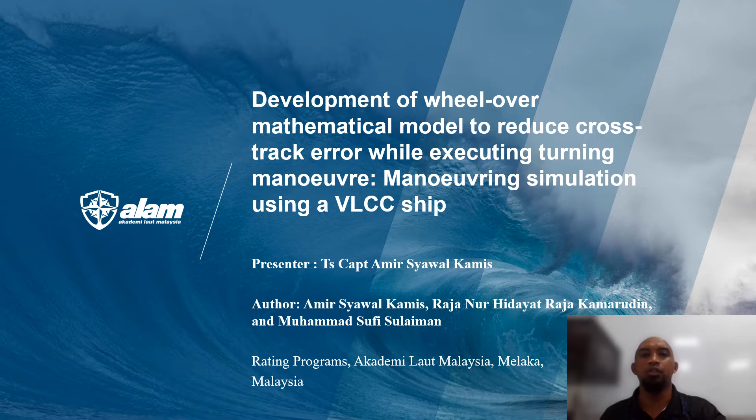My name is Amir Syawal bin Kamis. Today I will be presenting my research entitled The Development of Wheel-Over Mathematical Model to Reduce Cross-Track Error While Executing Turning Manoeuvre, Manoeuvring Simulation Using a VLCC Ship. So a little bit of background of the study.

I think everybody still remembers this incident where the mighty MV Ever Given completely blocked the Suez Canal for 6 days between 23 to 29 March 2021. Following the incident, the Suez Canal Authority demanded 916 million USD compensation due to the blockage of the traffic. Initial investigation suggested that the ship was mismaneuvered due to strong gusts of wind without ruling out the possibility of human error and equipment failure.

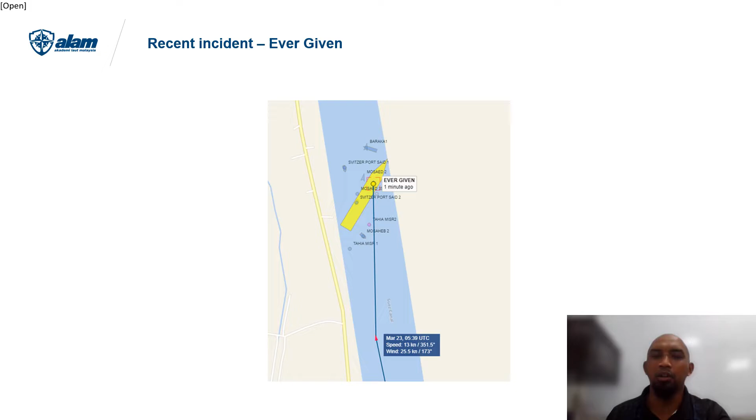And then approximately 3 months later, another mismaneuver incident happened in Kaohsiung, Taiwan. What happened was the OOCL Durban was trying to make a turn. Unfortunately, the vessel overshot and hit YM Constancy, which was safely alongside at the time, and subsequently hit a crane which tumbled onto another crane, which caused a huge catastrophe.

So basically, a ship needs to follow a passage plan or a voyage plan. Prior to a voyage, there will be a plan which will conclude which course to take. There will be a few connected courses that a ship needs to follow. The ship needs to follow this charted course meticulously and avoid going out from the course.

Whenever a ship goes out from the course, this is what we call off-track maneuvering, which can cause cross-track error. There will be a distance between the course intended to be followed and the actual course that the ship is following. The distance between these two is called cross-track error. Staying on course is difficult, particularly while changing the ship's course, where the ship can overshoot from the planned track. Therefore, the wheel-over point needs to be accurately determined.

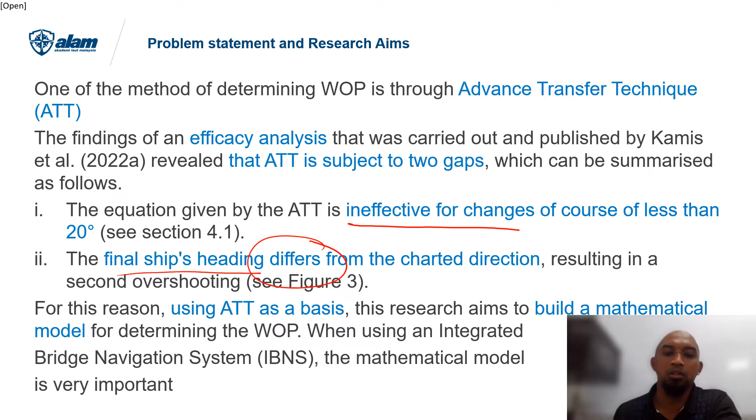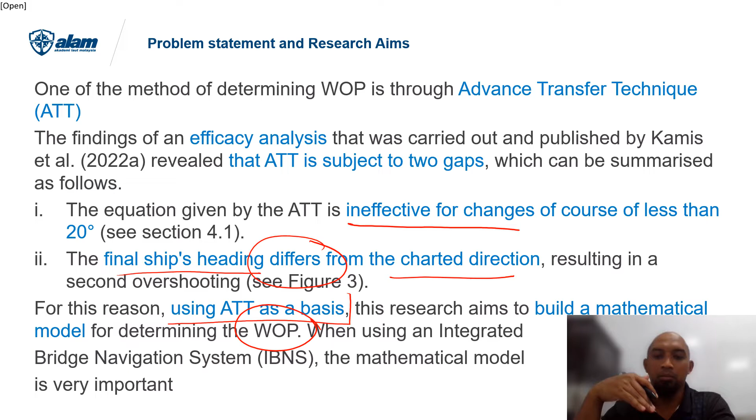The second one is that the final ship's heading differs from the charted direction, resulting in a second overshoot. Later on we'll see visually what it means. So for this reason, using ATT as a basis, this research aims to build an improved mathematical model that can be used to determine an accurate wheel-over point. This is important because the mathematical model can be used as a computer language in the integrated bridge navigation system, because in future everything will be autonomous.

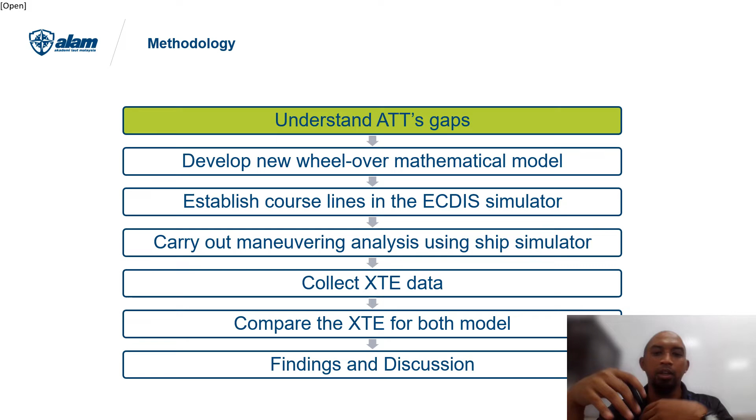Alright, so the methodology. The first step is to review and understand the ATT's gaps. From there, we were able to develop a new mathematical model. After that, we went to the ship simulator to establish the course line and carried out a maneuvering analysis. We simulated what happened when we used the advance transfer technique and when we used the wheel-over mathematical model, and then compared these two data, specifically the cross-track error data, to see whether or not the cross-track error reduced. In the analysis we used percentage change to see the declining trend of the error.

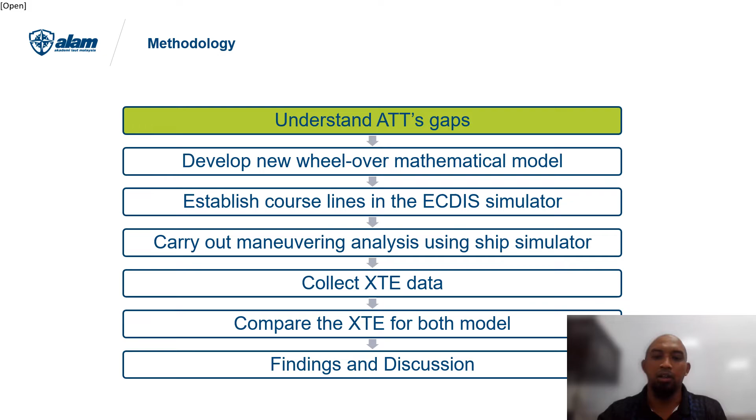First we review the ATT method. So this is the advance transfer technique method, and this is the formula for the advance transfer technique.

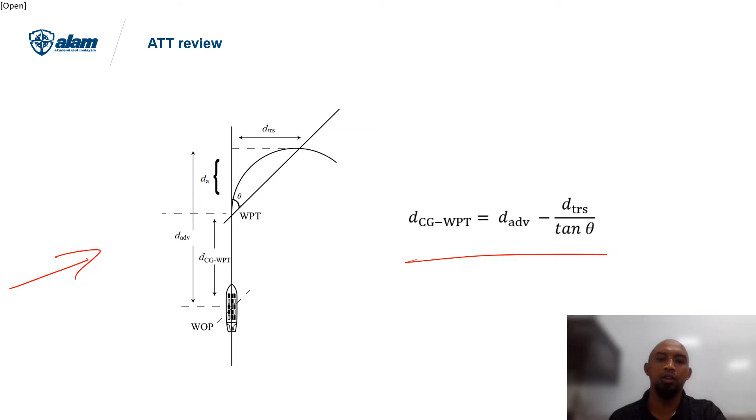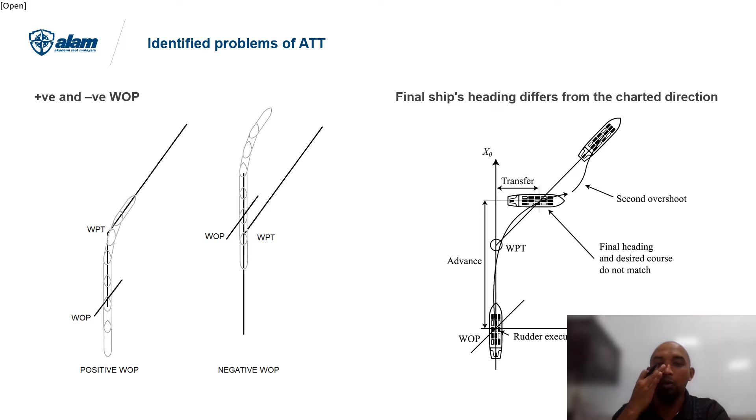So there are two gaps that were identified with regard to ATT. The first one is whenever you use ATT to calculate wheelover point that is less than 20 degrees, the value comes out as negative. What does negative wheelover point mean? It means the wheelover point is after the waypoint, which is illogical, right? You're supposed to alter before the waypoint. If you alter after the waypoint, it means you have already overshot. Therefore, ATT is not suitable to be used in autonomous ships, because the algorithm itself will tell the ship to overshoot first, then only alter.

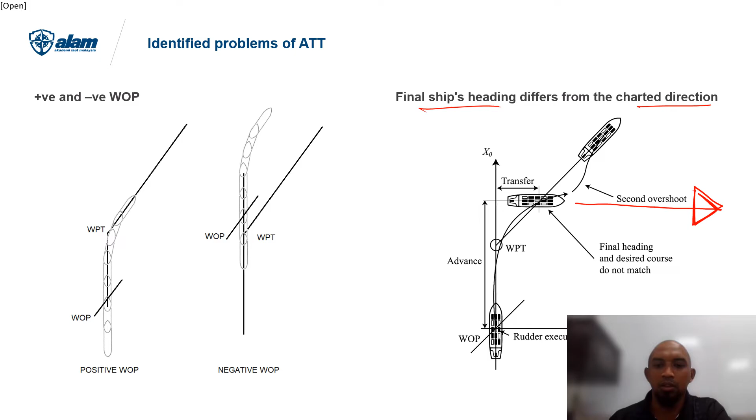And then after that, as you can see here, the final ship's heading differs from the charted direction. This ship is heading this way, but the intended course is this way, so it differs. So by understanding these two gaps, the idea is to make sure that the heading and the charted course are the same.

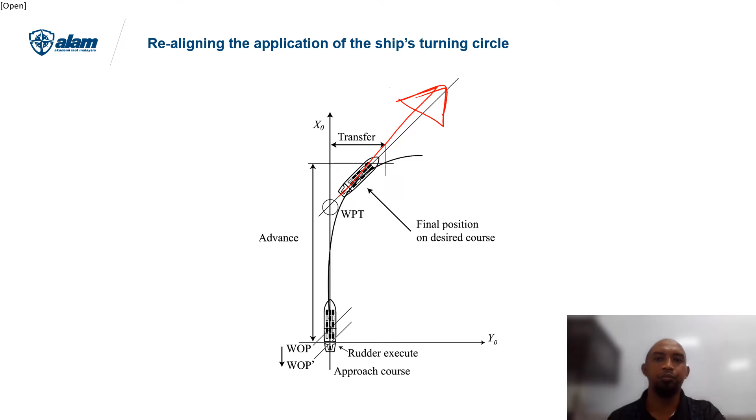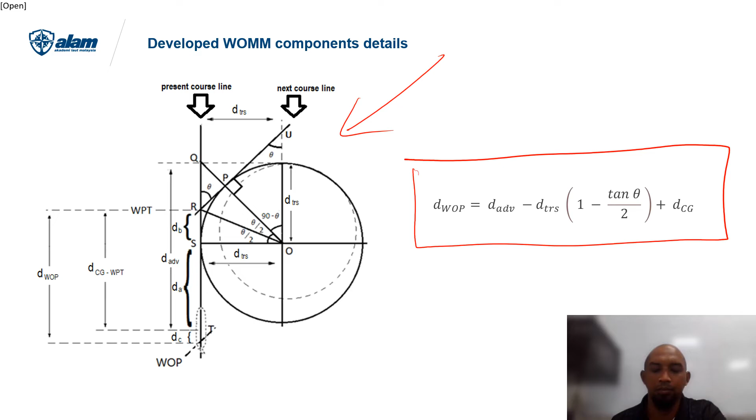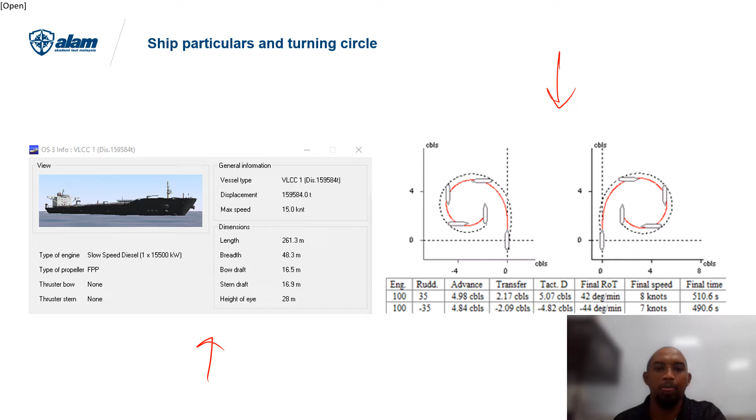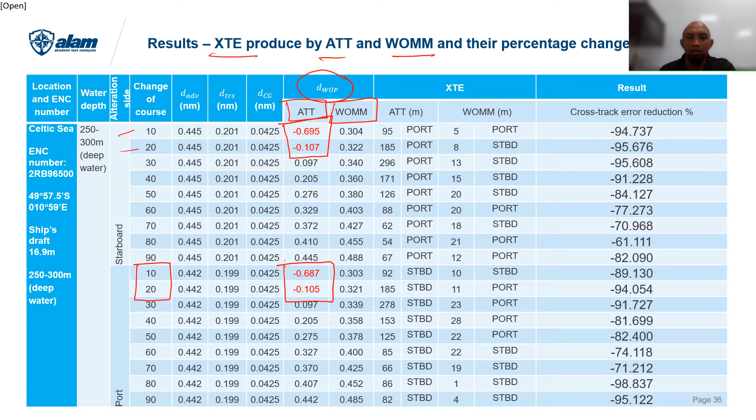At least we tackle one of the gaps first, and then we come to the cross-track error. Whenever you use advance transfer technique, this is the cross-track error. When we use the wheelover point mathematical model, this is the cross-track error. So it's important to highlight that this research was developed to reduce, to minimize the cross-track error. We need to minimize the error as much as we can, we want to make sure that the error is zero. The error is supposed to be zero.

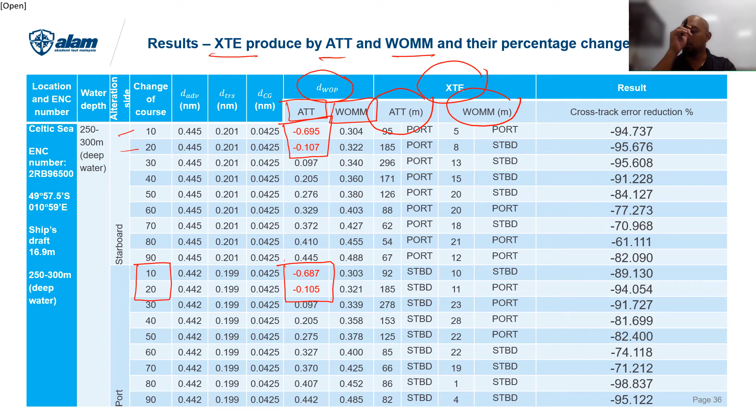So even though the wheelover mathematical model developed in this research wasn't able to bring the error to zero, we can see visually that a lot of improvement has been done. You can see from the result, all negative - the cross-track error reduction percentage is all negative, meaning there is a declining trend, and a very significant one as well. So the negative percentage change value as seen in table 1 suggests that a significant reduction of the cross-track error was obtained during the manoeuvring analysis when we changed from ATT to the wheelover point mathematical model.

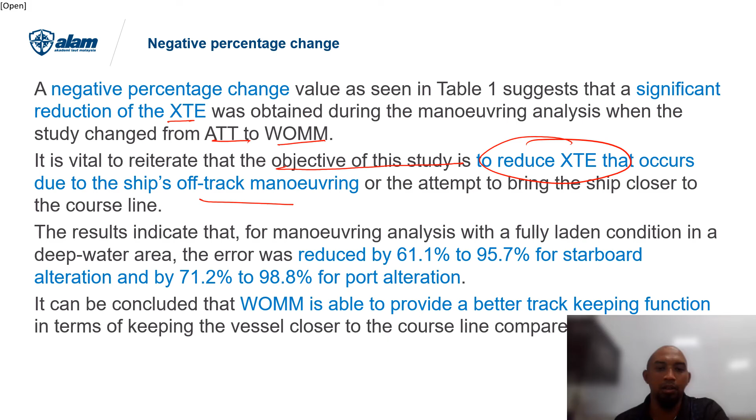The objective of this study is to reduce cross-track error that occurs due to the ship's off-track manoeuvring, or the attempt to bring the ship closer to the course line. The result indicates that for manoeuvring analysis with fully loaded condition in the deep water area, the error was reduced by 61.1% to 95.7% for starboard alteration, and 71.2% to 98.8% for port alteration. So it can be concluded that the wheelover point mathematical model is able to provide a better track-keeping function in terms of keeping the vessel closer to the line compared to advance transfer technique.

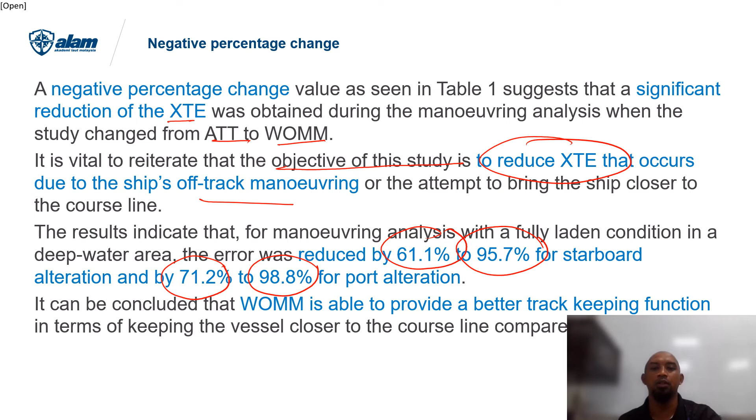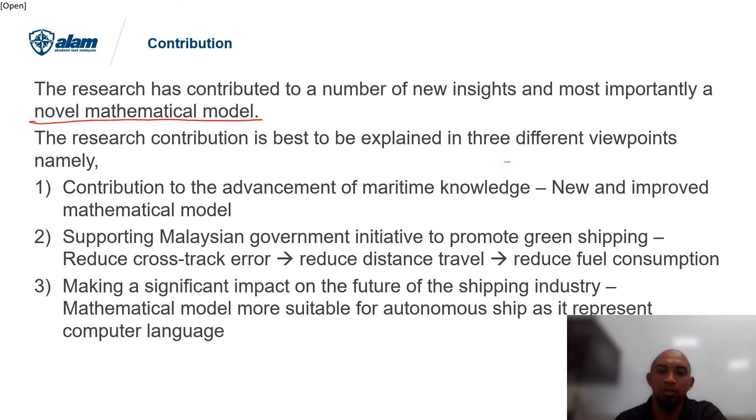So the contribution of this research, first of all, it contributes a novel mathematical model, an improved version, right? And then the contribution can also be explained in 3 different viewpoints. The first one is contribution to the advancement of maritime knowledge - the knowledge itself has been improved, a new and improved mathematical model.

Second of all, it supports the Malaysian government initiative to promote green shipping. Why? Because whenever you reduce cross-track error, you actually reduce the distance travelled. Whenever you reduce the distance travelled, you are actually reducing fuel consumption, and you will be able to reduce greenhouse gas emissions, nitrogen oxide, NOx, sulfur dioxide. So as a direct result, you will be able to reduce all of this. So we are actually promoting green shipping.

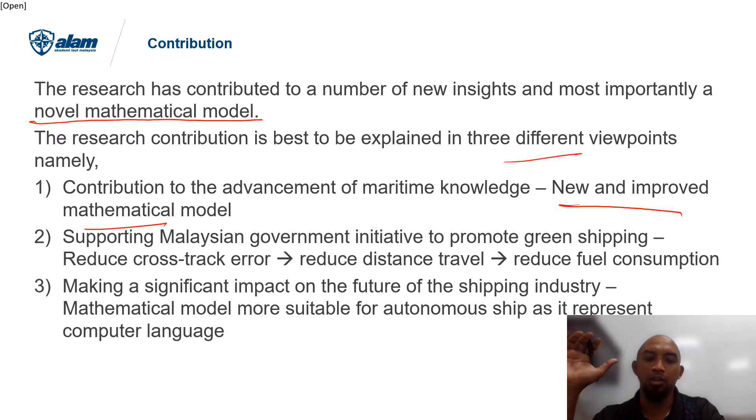And finally, making significant impact on the future of the shipping industry. Nowadays we are talking about autonomous ships, unmanned ships. So we need an improved mathematical model that can be used, that can serve as an algorithm for navigation. We cannot afford to have a negative wheelover point, because we are basically telling the ship to overshoot first, then only alter. No, we can't afford to have that. So yeah, basically this research makes a significant impact on the future of the shipping industry.